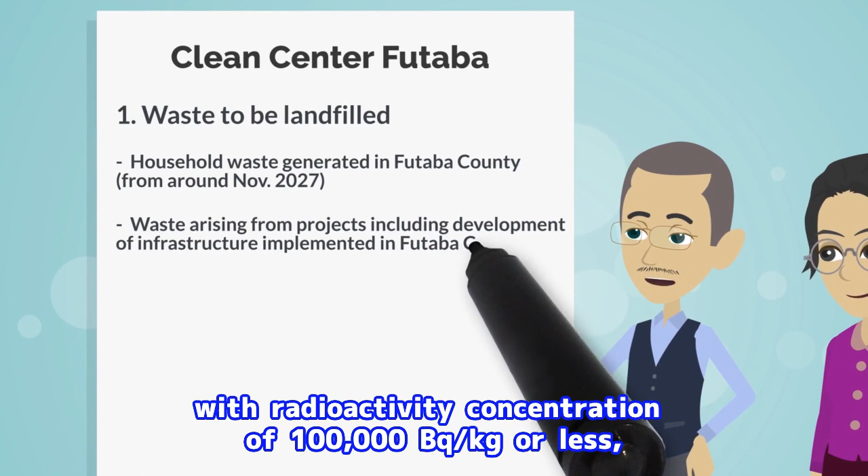To address these issues, in the Clean Center Futaba, from around November 2027, household waste generated in Futaba County, waste arising from projects including development of infrastructure implemented in Futaba County, as well as the specified waste with radioactivity concentration of 100,000 becquerel per kilogram or less generated in the specific reconstruction and revitalization base areas, are supposed to be landfilled. The time period for landfill will be around 10 years, with a review according to the progress of the project, and its operation was resumed on June 1, 2023.

I see. To address these issues, its operation was resumed. By the way, how is the waste specifically landfilled in the Clean Center Futaba?

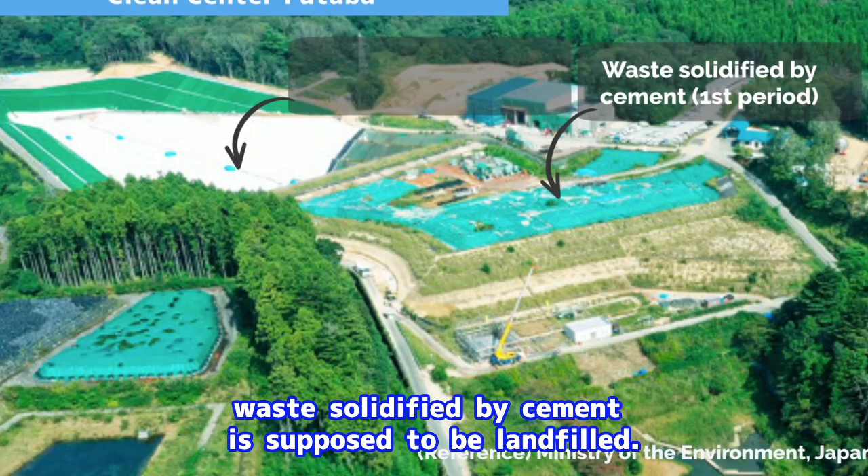Well, as is the case with the former Fukushima Ecotech Clean Center, the landfill site consists of two areas. In the first period area, where waste has already been landfilled since before the disaster, waste solidified by cement is supposed to be landfilled. And in the second period area, where nothing is landfilled, waste which is not solidified by cement is supposed to be landfilled.

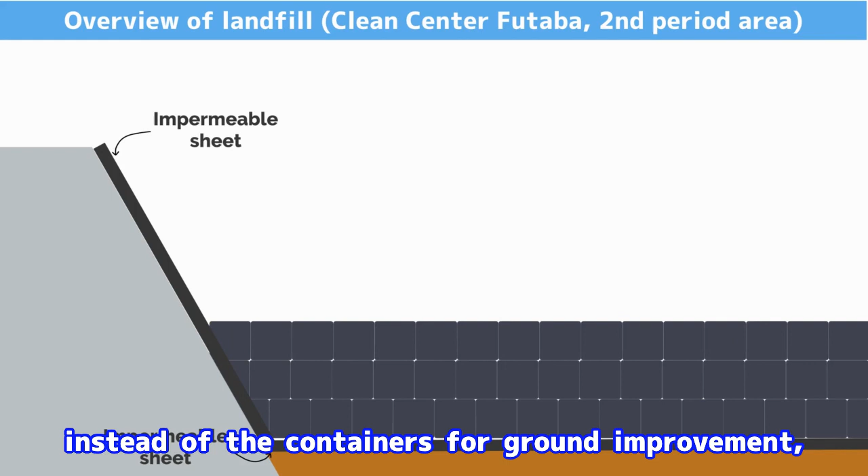The method for landfill of the specified waste is almost the same as that of the former Fukushima Ecotech Clean Center. This is an example of the second period area, where there is no existing waste. Impermeable sheets are laid over the whole area to prevent leachate from leaking outside the landfill site. On the impermeable sheets, the waste is piled up, shielded in containers. However, in the Clean Center Futaba, instead of the containers for ground improvement, cubic containers are used, even when the waste is not solidified by cement.

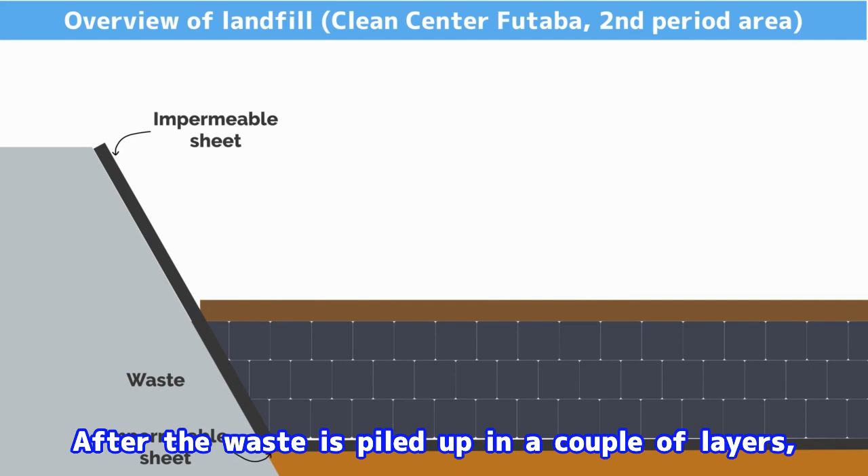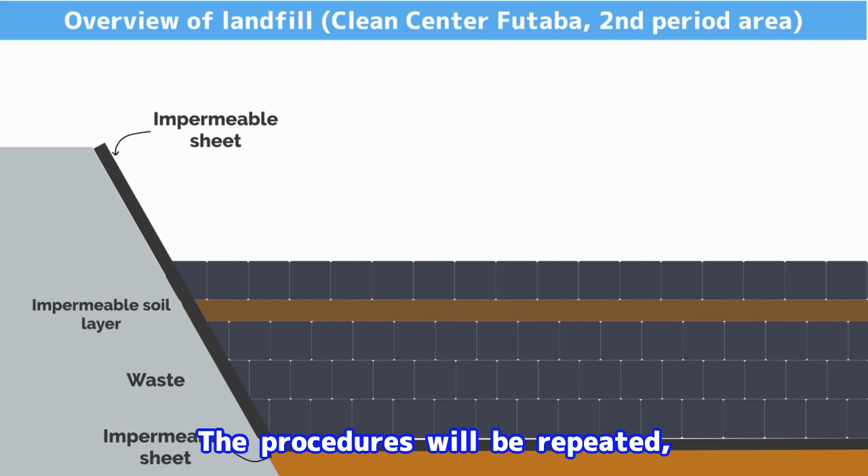After the waste is piled up in a couple of layers, an impermeable soil layer is laid on the waste to absorb radioactive cesium, even if the waste leaks out of the containers. The procedure will be repeated, with the waste piled up in a couple of layers followed by laying an impermeable soil layer on the waste, up to the top of the landfill site.

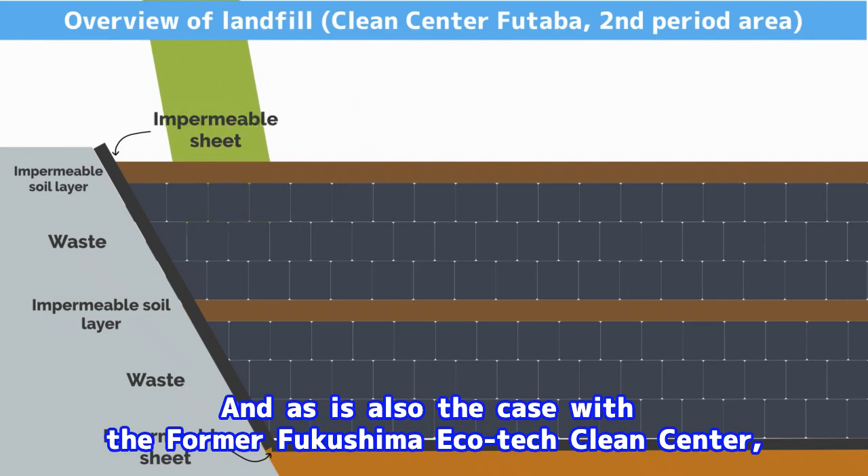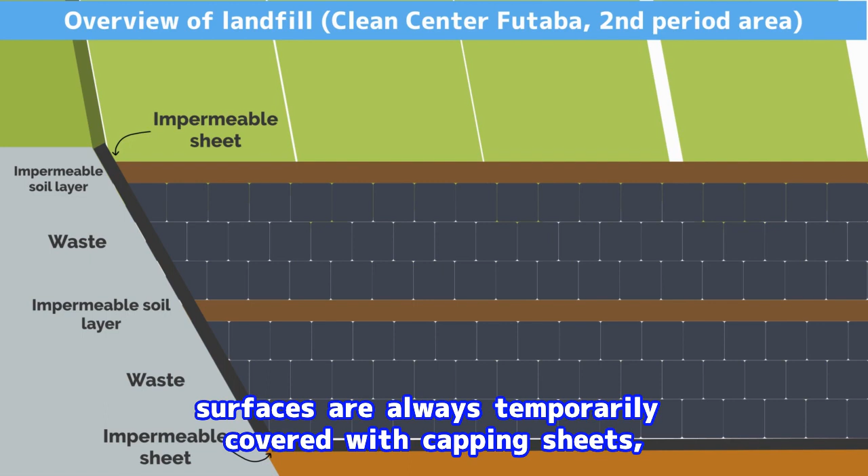And as is also the case with the former Fukushima Ecotech Clean Center, in the areas where landfill works are not in operation, surfaces are always temporarily covered with capping sheets, to reduce rainfall coming into the landfill site and to reduce contact with waste as much as possible. That leads to a decrease in the amount of leachate to be treated in the leachate treatment facility.

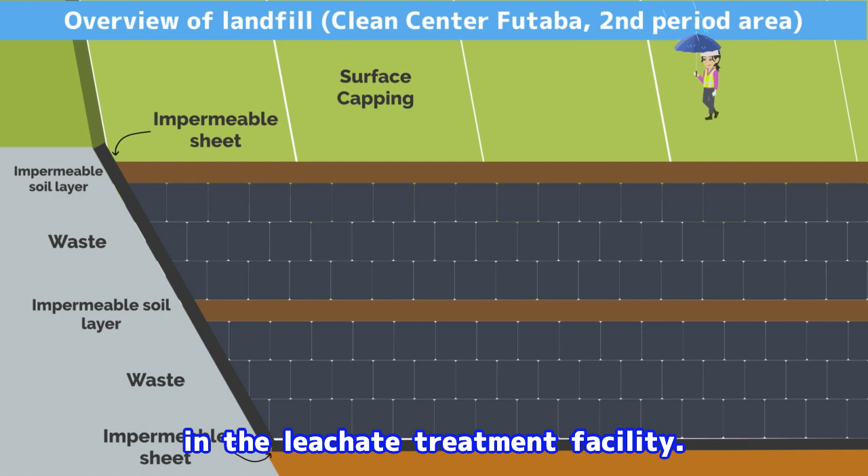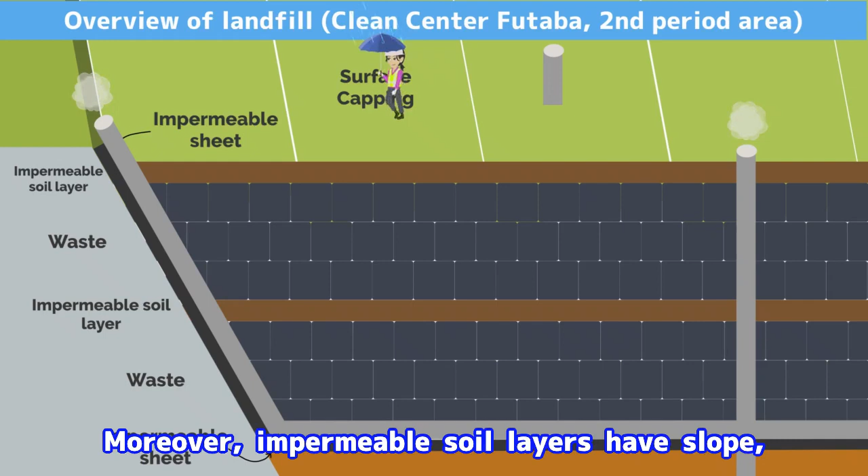In addition, gas ventilation pipes are equipped on the slopes and inside the landfill site, to prevent accumulation of flammable gas, even if it is generated due to fermentation of the waste. Moreover, the impermeable soil layers have a slope, and also taking advantage of the gas ventilation pipes, even if rainfall comes into the landfill site, it is drained out of the landfill site as quickly as possible.

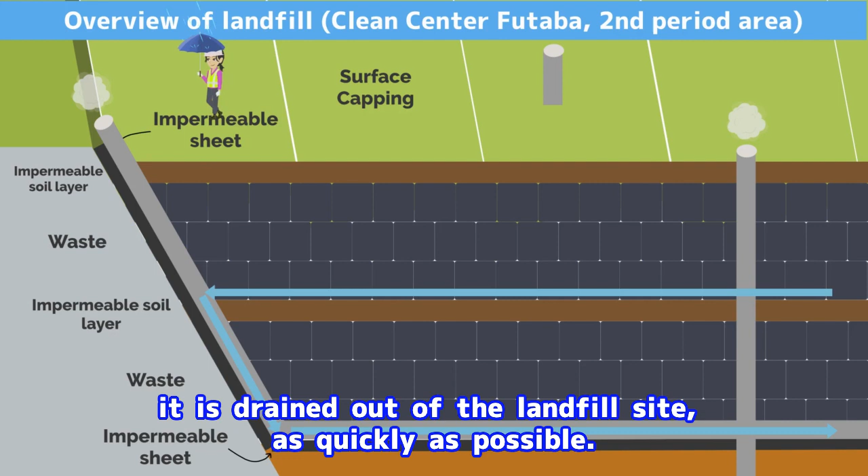It is surely almost the same landfill method as that of the former Fukushima Ecotech Clean Center. By the way, how is the drained water treated?

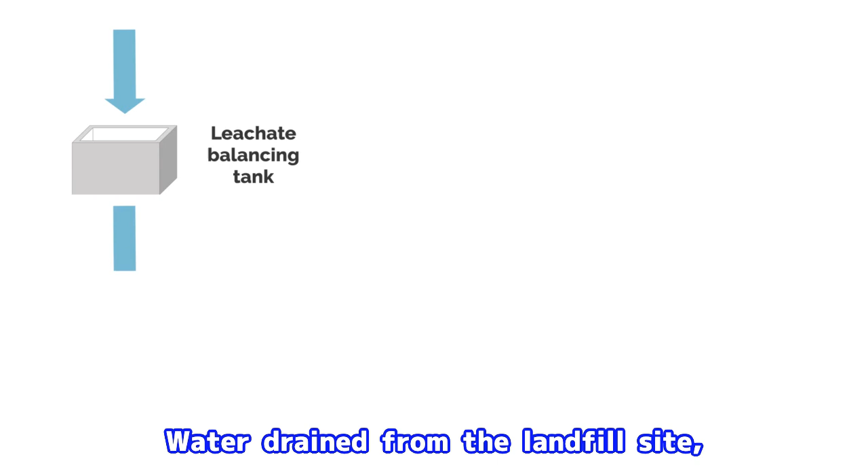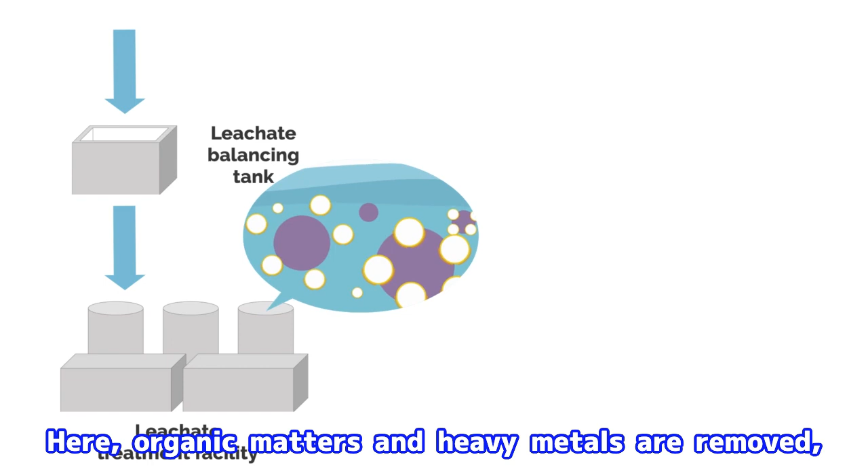Well, that is the same with the methods implemented in the former Fukushima Eco-Tech Clean Center. Water drained from the landfill site is once sent to the leachate balancing tank, followed by further being sent to the leachate treatment facility. Here, organic matters and heavy metals are removed through coagulation, sedimentation, and filtration. The treated water is temporarily stored in the treated water balancing tank.

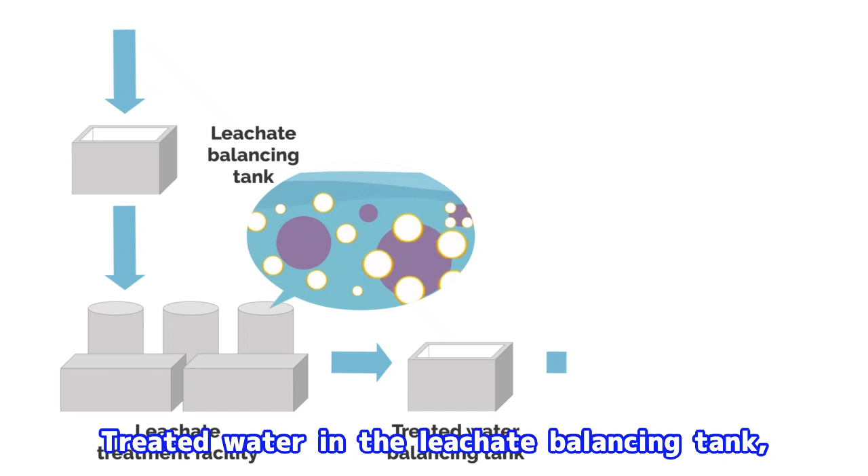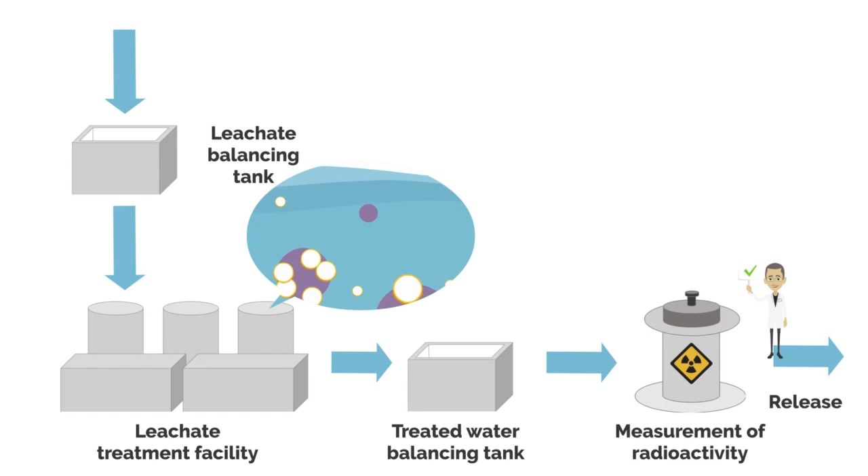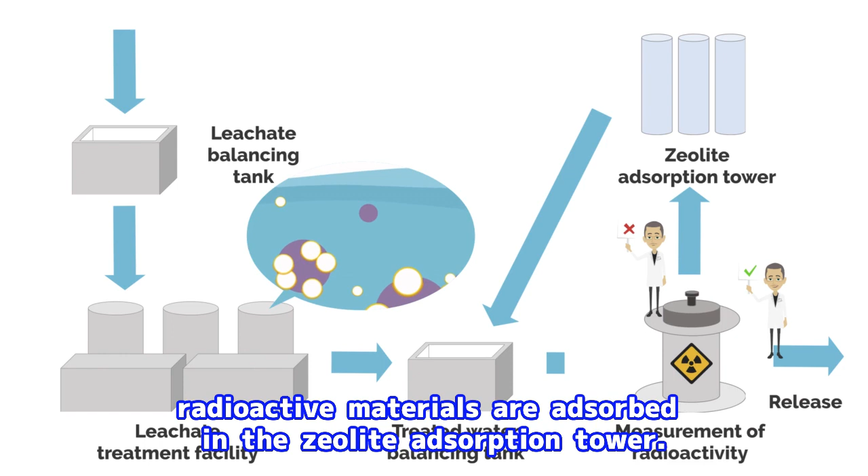Treated water in the treated water balancing tank is released into the environment after it is confirmed that its radioactivity concentration is less than the criterion. In the unlikely event that the radioactivity concentration in the treated water exceeds the criterion, radioactive materials are adsorbed in the zeolite adsorption tower. Then, its radioactivity concentration is measured again, and it is released into the environment after it is confirmed that it is below the criterion.

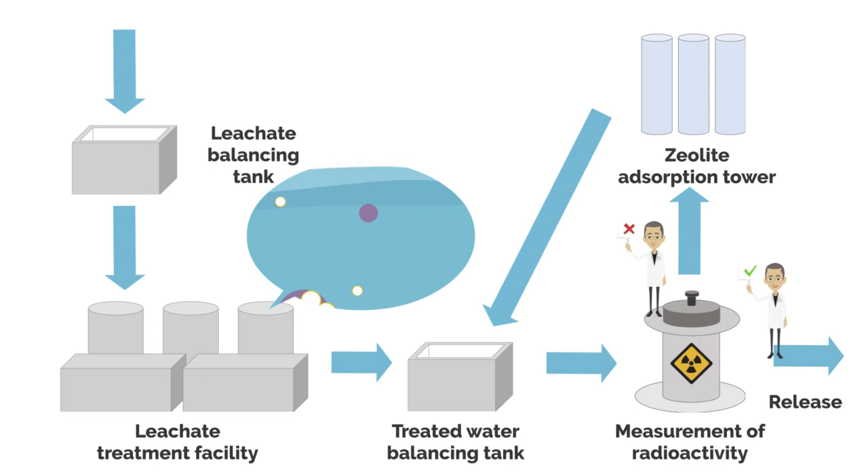I see. Then, not fully, but almost, I have understood the two landfill facilities for the specified waste. So, you have told all the treatment procedures of the specified waste, haven't you? Well, not all of the specified waste is landfilled in the landfill facility for the specified waste, but part of the waste is recycled. In addition, so far, I have talked about the treatment procedures implemented under the legal framework,

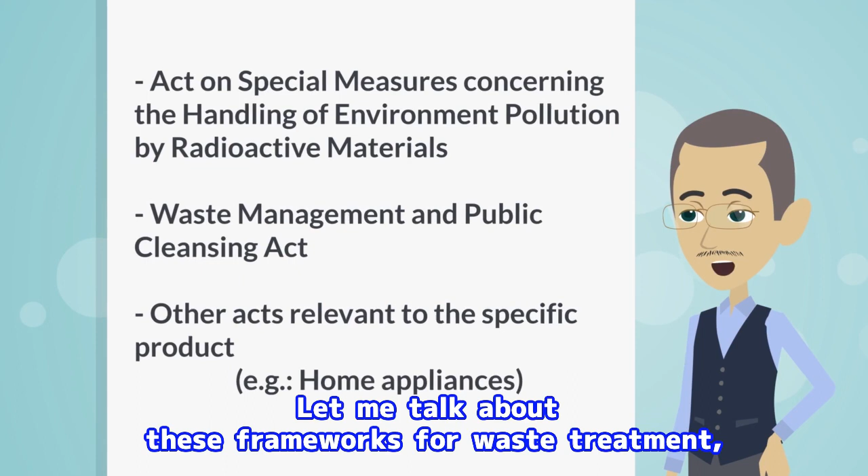based on the Act on Special Measures Concerning the Handling of Environment Pollution by Radioactive Materials, including soil and waste arising from decontamination activities. Other than that, there are other frameworks, for example, based on the Waste Management and Public Cleansing Act, and other acts relevant to the specific product, including home appliances. Let me talk about these frameworks for waste treatment, if I have any opportunities.

So, let me wrap up my lecture by providing you the key points. Today, of the two landfill facilities for the specified waste, I talked about the Clean Center Futaba. This facility is the final disposal site of the Wide Area Municipal Association of the Futaba region. It is located in Okuma town and was established in 1998. Its operation had been suspended after the disaster, but was resumed from June 1, 2023.

There are three kinds of waste to be disposed of in this facility. First, household waste generated in Futaba County. It is scheduled for the landfill to be started from around November 2027. Secondly, waste arising from projects including development of infrastructure, implemented in Futaba County. And last one is the specified waste generated in the specific reconstruction and revitalization base areas, with radioactivity concentration of 100,000 becquerel per kilogram or less.

The specific landfill methods are same with the former Fukushima Eco-Tech Clean Center, which is mentioned previously, but waste solidified by cement, and waste which is not solidified by cement, are separately landfilled. With regard to more specific landfill methods, these are also same with the former Fukushima Eco-Tech Clean Center, but I explained that impermeable soil layers and waste layers are laid alternately.

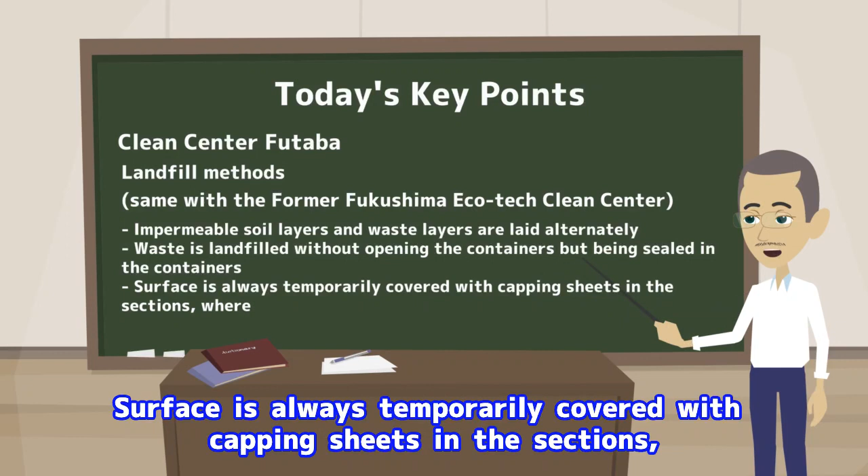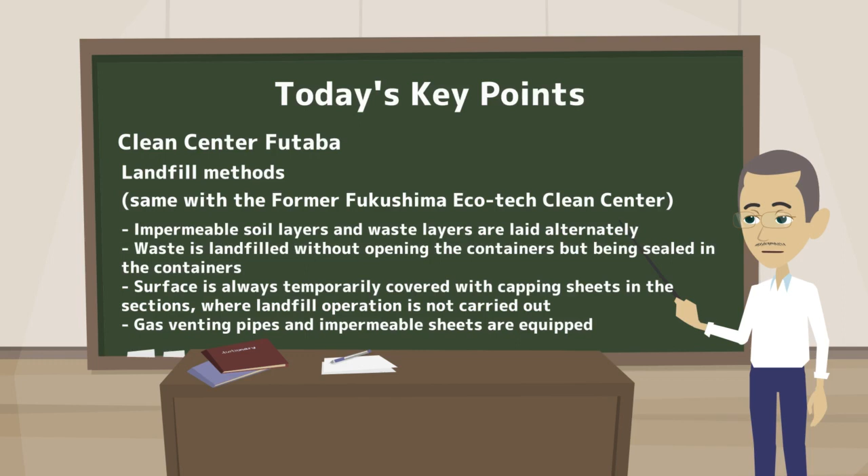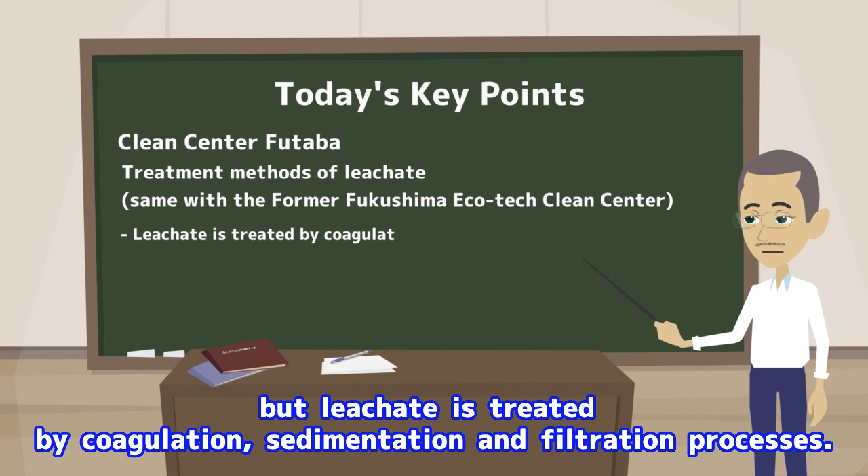Waste is landfilled without opening the containers, but instead being sealed in the containers. Surface is always temporarily covered with capping sheets in the sections where landfill operation is not carried out. And lastly, gas venting pipes and impermeable sheets are equipped. With regard to the treatment methods of leachate, these are also same with the former Fukushima Eco-Tech Clean Center, but leachate is treated by coagulation, sedimentation, and filtration processes.

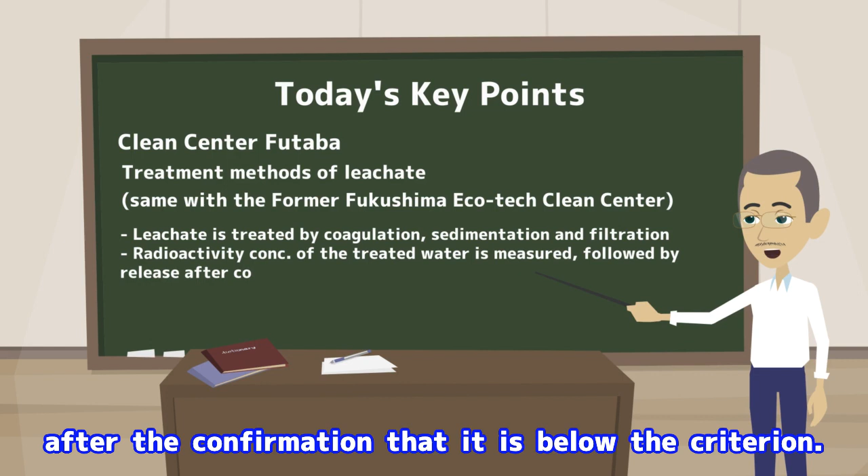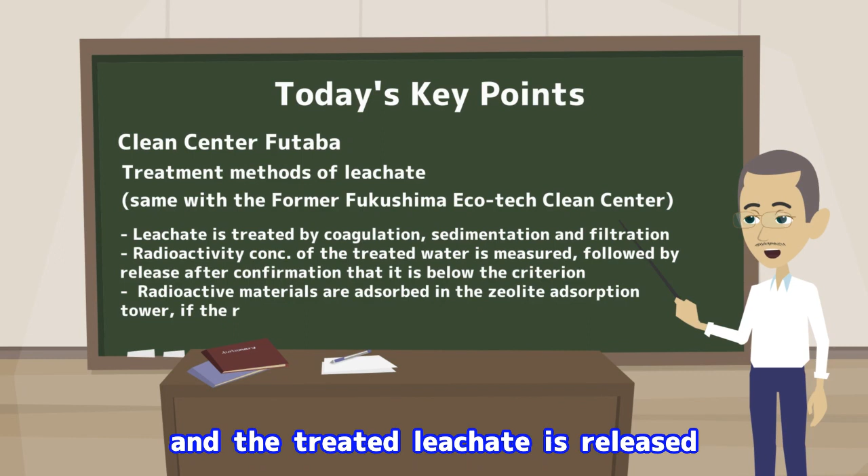Radioactivity concentration of the treated water is measured, followed by release into the environment, after the confirmation that it is below the criterion. Radioactive materials are adsorbed in the zeolite adsorption tower, if the radioactivity concentration exceeds the criterion, and the treated leachate is released after remeasurement of radioactivity concentration, and confirmation of compliance with the criterion.